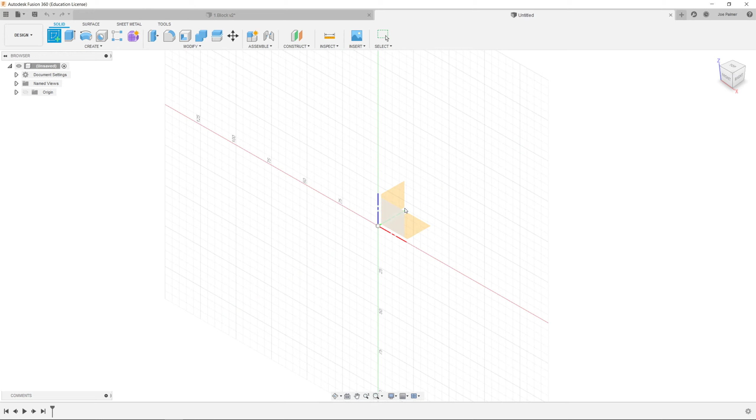To do that, we go to the toolbar and click the Create Sketch button. We're prompted to pick a datum plane to locate our sketch. It doesn't matter too much which plane I pick, so I'll pick this one. As soon as we've selected a plane, we're dropped into the sketch view, rotated so we're looking at our sketch, and presented with all the sketch tools to create our 2D geometry.

As we're creating a simple cube, I'm going to use the 2-point rectangle tool, found on the Create section of the menu. I click the 2-point rectangle, locate the top left-hand corner on the origin of my model, click, and place the other corner a bit further away.

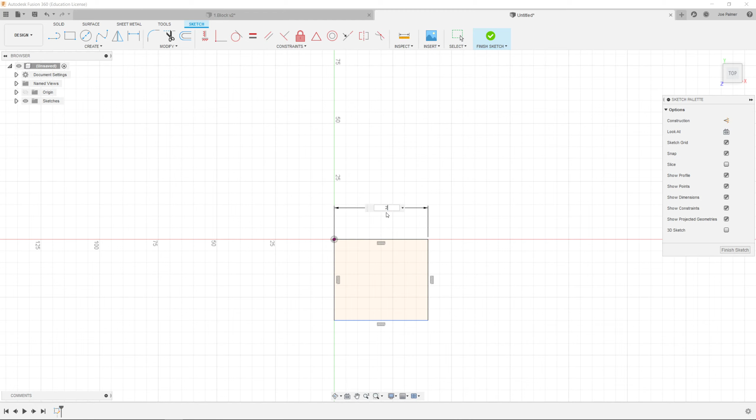As soon as I'm done drawing the rectangle, I need to assign the correct sizes. I'll use the Sketch Dimension tool, click on one edge of my rectangle and set this to 25 as per the engineering drawing, then click on the other edge and also set this to 25.

I'm happy with that sketch, so I can click Finish Sketch. Now that I have a single 2D sketch, I can use that to extrude the material required for the main cube or main body of this component.

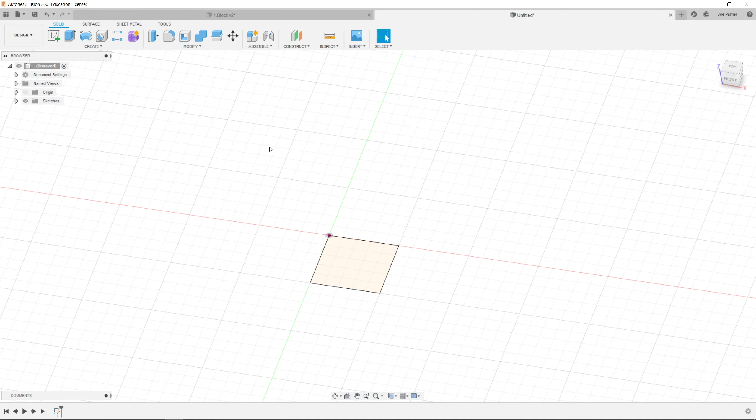I do that by going to the Create menu and the Extrude tool. Because I already had this sketch selected before entering the tool, it's automatically picked that first sketch as the profile to extrude. If this wasn't the case, you'd be presented with a window like this, and I'd simply need to select the profile I wanted to extrude.

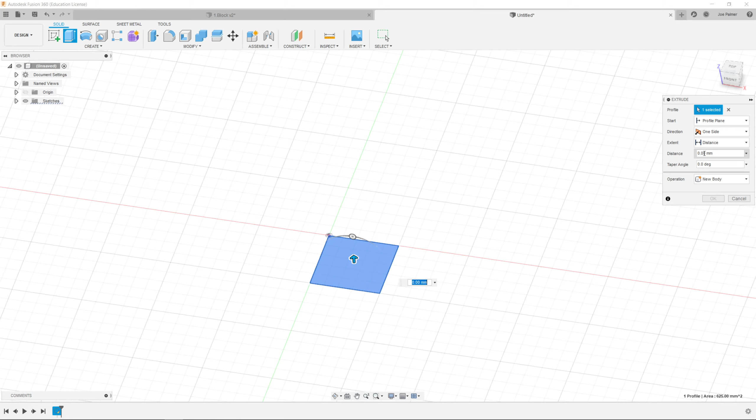I'm presented with a lot of options for the Extrude tool, and the only thing I need to set at this stage is the height of my extrude operation, which in this case is 25mm. I'm happy with how that bit of material looks, so I can press OK.

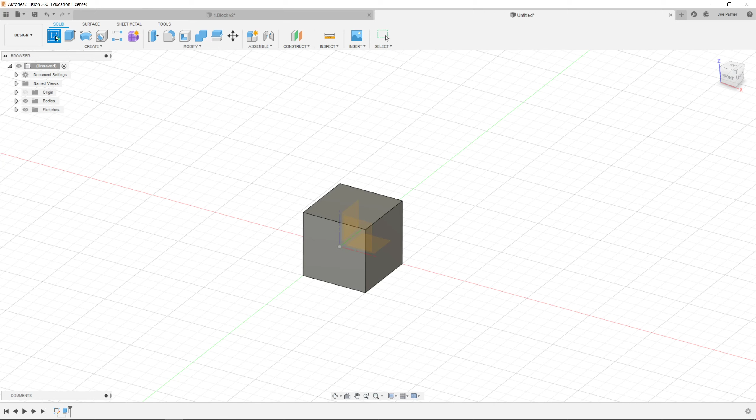I've now got two additional tiers in order to finish the model and get it looking like this. So I go again to my Sketch tool, and again I'm asked where I want to locate my sketch. This time, instead of picking one of the datum planes, I'm going to pick the top face of my model.

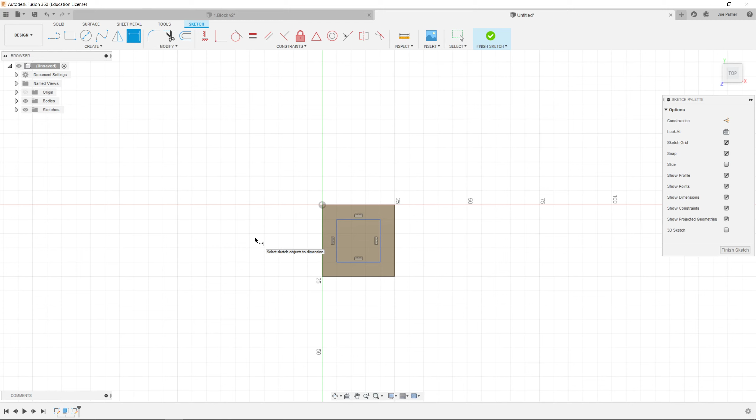Again I use my rectangle tool to sketch a rectangle, and again I go to my Sketch Dimension tool. This time, rather than dimensioning the square itself, I'm going to dimension between the edge of the sketched rectangle and the edge of the body I've already created.

By dimensioning the sketch this way, it means that no matter how I change the geometry of the original extrude feature, my second sketch will always have a border of 3mm from the edge. And if I place another dimension here, that gives me the required 19mm rectangle. I'm happy with that sketch, so again I can click Finish Sketch.

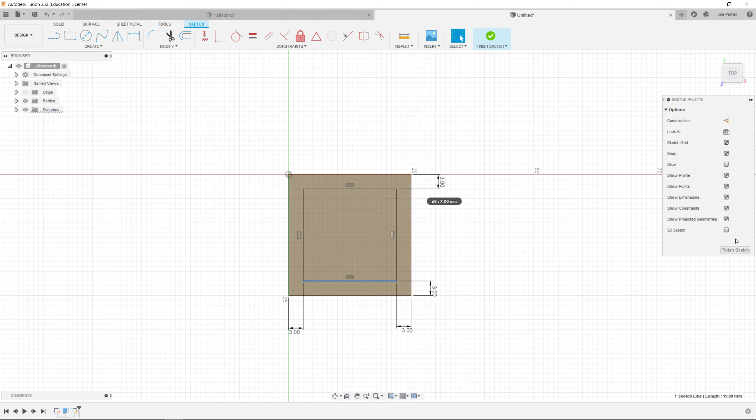Again I go to the Extrude tool, and again I pick the profile I've just sketched, and this time I'm going to set the height to 3mm.

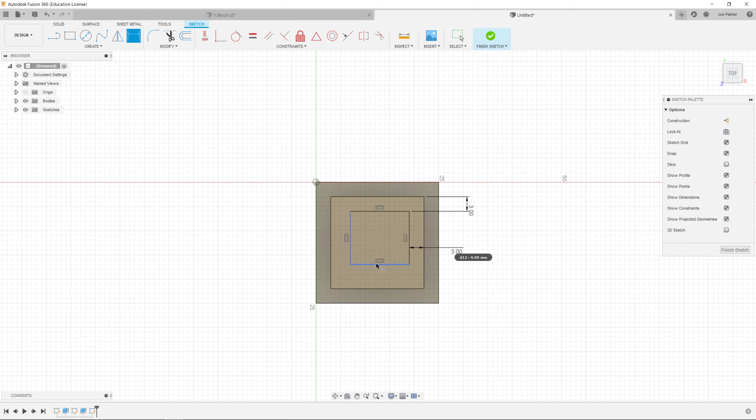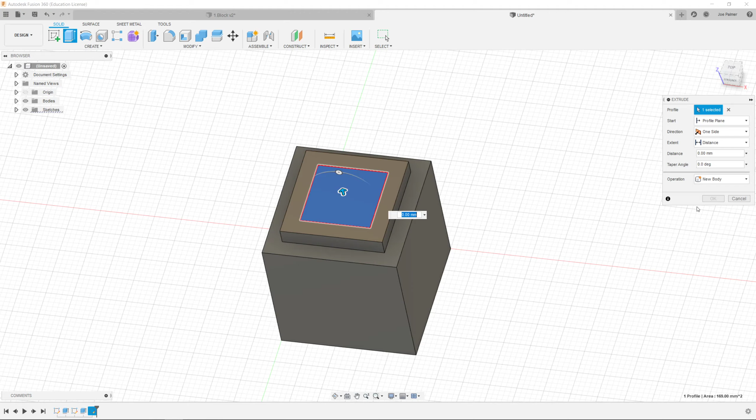Finally, I'm going to repeat the process one more time, and then complete my final extrude feature by going to Extrude, selecting the profile, and picking 3mm. One important point to note at this stage is the operation option in the Extrude dialog box.

Whenever we create new material in Fusion 360, we have the option to either create a new body, join that material to an existing body, use that operation to cut material from existing bodies or material, or create a Boolean operation by intersecting the two operations together.

In this case, I want to join the material to the existing extrude features. I want to make sure that by the time I finish this component, I only have one body of material left, so I'm going to leave that as join.

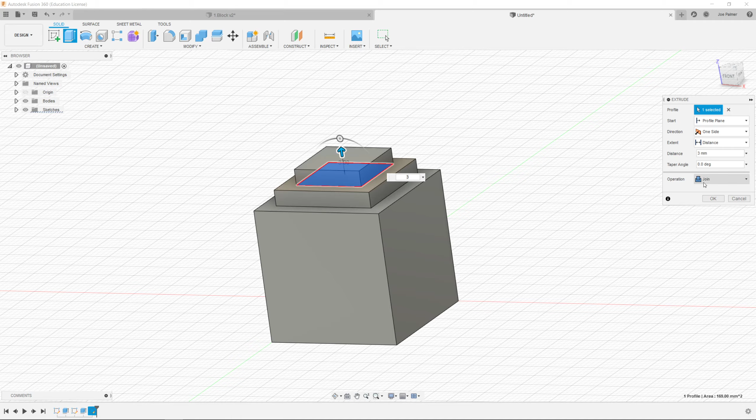Okay, I now have my basic form of my component. I just need to add the round features to the edges of the component. So in order to do that, I go to my Modify menu and go to Fillet.

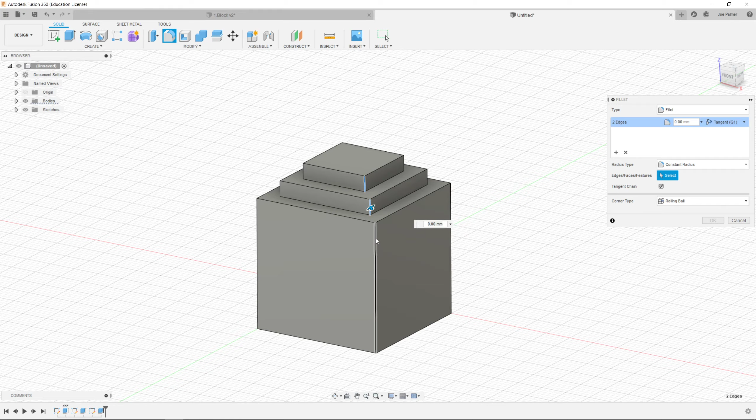All I need to do here is select the edges which I wish to apply a round or fillet feature to. So I'm going to pick the edges on this corner and set those to 3.

If I now want to pick additional edges, I can hold down the control key and continue to pick as many edges as I require to complete my component. I'm happy with that feature, so I can press OK.

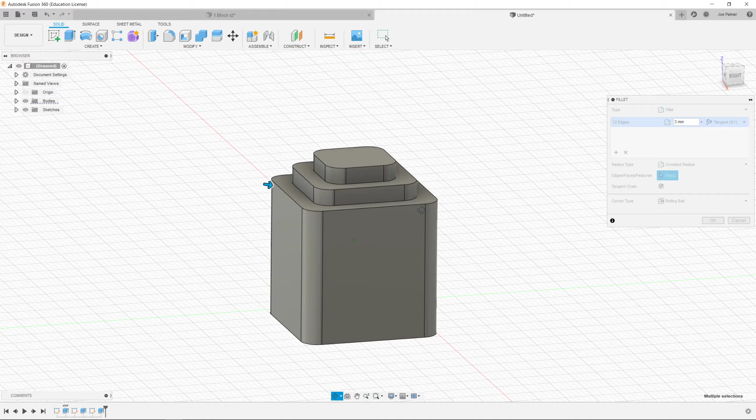Just one final check: if I look at my original block that I'm trying to model and the component I've just created, they look very similar. All of my dimensions are according to the drawing, so I'm happy with this component and it's now finished.